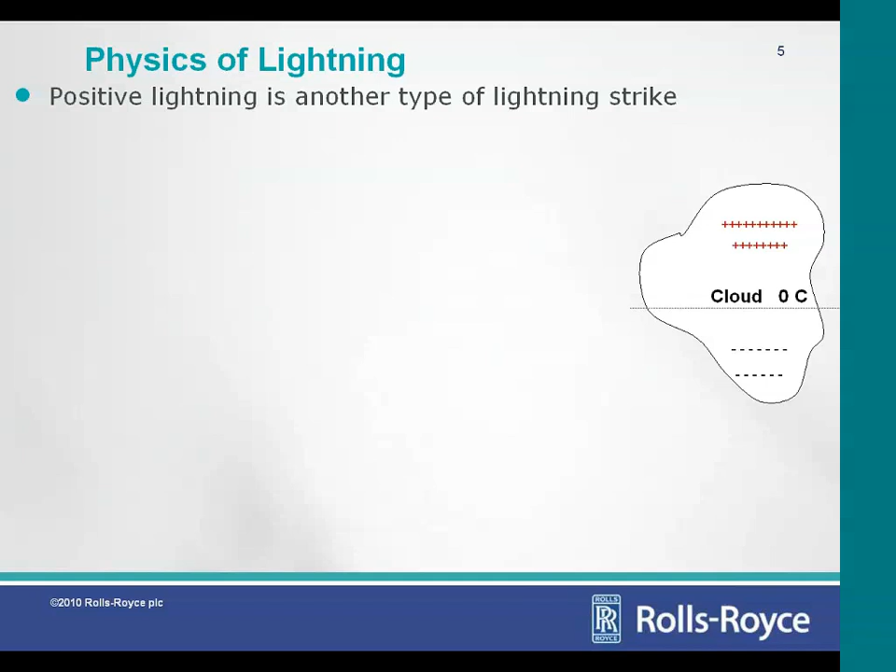Now, positive charges are accumulated on top of the cloud, and in this case, because of the height — the top of the cloud can be several kilometers higher than the bottom — the amount of charge that has to be reached on top of the cloud before you get enough energy to break the equilibrium and start the discharge is higher.

So normally, in terms of lightning populations, out of 100 lightning strikes, about 90 to 95% are negative lightning, as the previous speaker said, and about 5% or less are positive lightning. But it also needs to be said that positive lightning has much more energy and much more current.

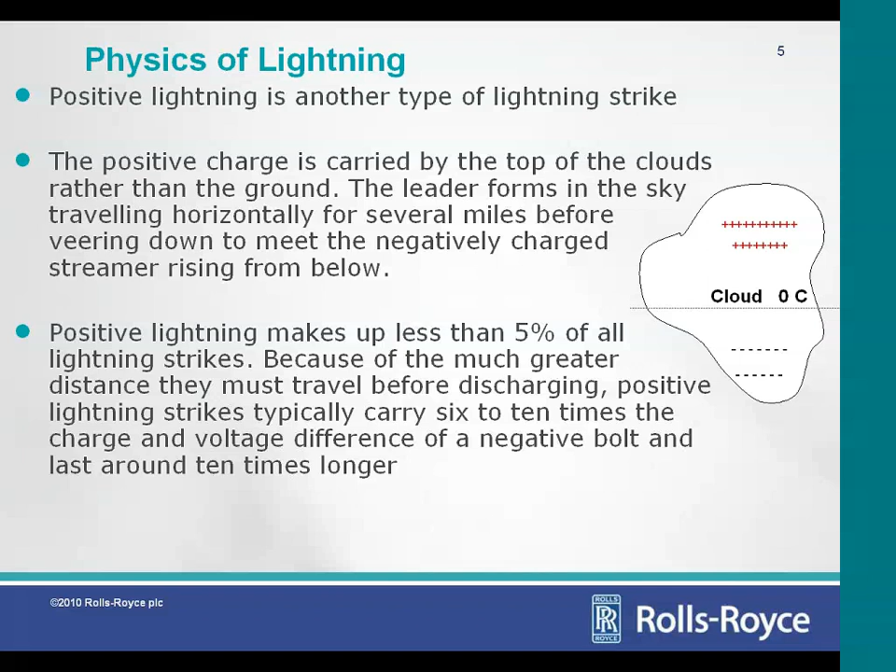So this is a picture which shows the lightning current as defined in the standards. It's a waveform which rises to the maximum value, defined in the standards to be 200 kiloamps within the first 6 microseconds, and then decays to half value at 70 microseconds, and then clearly tails off.

Now, if you do a spectrum analysis of that, so if you look at the energy density versus frequency of this pulse, you would see that the higher the energy is at the lower frequency. So as correctly mentioned, at higher frequency you inject less energy. This graph is quite important to remember when you do an analysis or some modeling. You have to bear in mind this relationship between the time aspect of the lightning and the frequency aspect and the energy density of the lightning.

As I said, the main lightning pulse in the standard is called component A, and it's a double exponential with 6.4 microseconds rise to the peak and then 70 microseconds tailing off, with a peak value of 200 kiloamps.

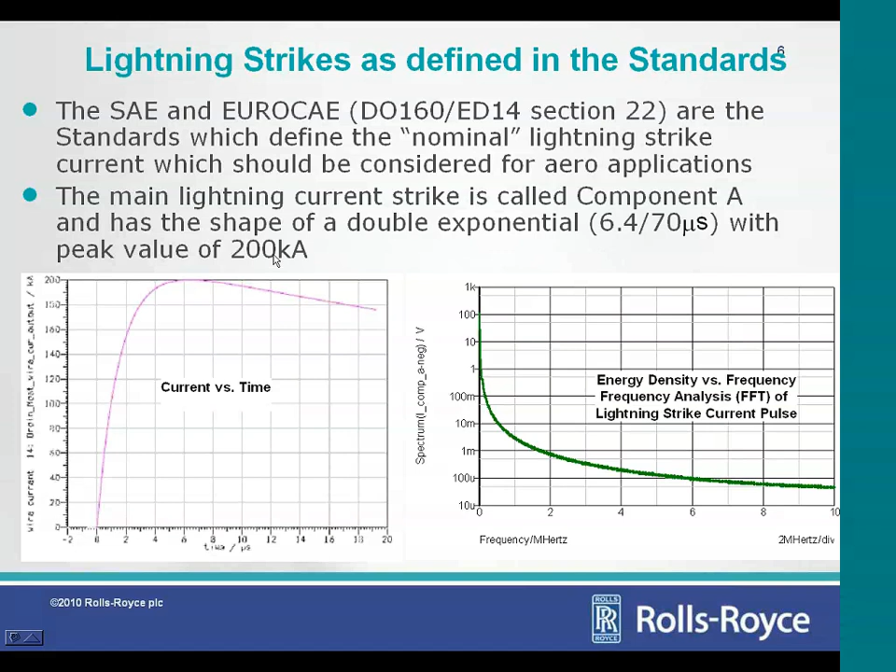Now, the limitation of the standard is that statistics indicate that you can get lightning which are much more energetic. In fact, you can get lightning with peak values of 250 kiloamps or higher. And also you can get lightning which lasts much longer than what the standards define—you can easily get lightning that lasts for 2 milliseconds. The first component, component A, can be about 20 times higher than what is defined in the standards.

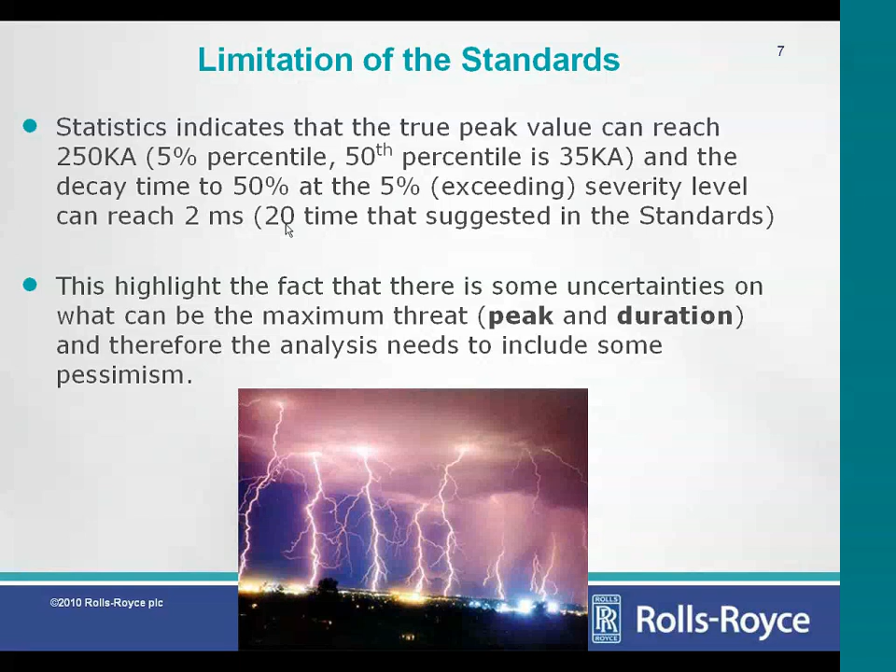So this highlights the fact that there are some uncertainties on what is the maximum threat in terms of peak and duration, because if you just use the standards, the DO160, you would see that the definition of peak and duration is not necessarily the worst case. Therefore, when you do an analysis and a design which needs to be robust to lightning, you need to include some pessimism in your analysis and have good margins on top of what you have to meet for passing the standards test.

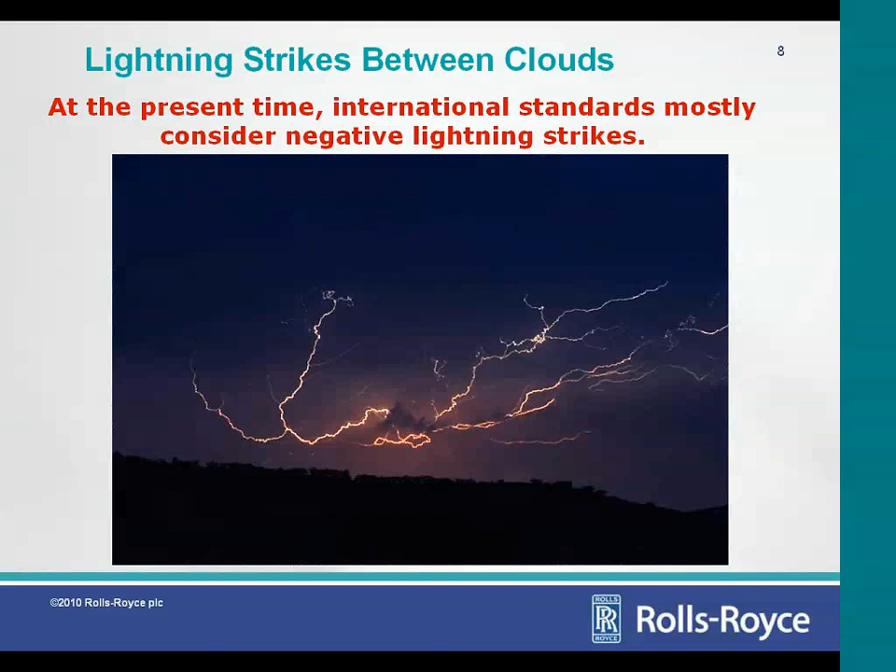So, just to recap, this is a nice picture because it shows intra-cloud lightning—lightning which doesn't close to ground, and it's quite energetic and covers a very big area in the sky. But as I said, international standards mostly cover negative strikes and not positive ones.

Now, what can this lightning current do to an aircraft? Well, clearly the simplest one to understand is actual physical damage. When you are hit by lightning, you basically have a sudden inrush of current that you need to quickly distribute away from the point of contact, because the temperature at the point of contact will start to rise quite quickly. And if the resistance of the point of contact is too high, so you're not able to take the current away quickly enough, then you will reach the melting point of the metal or composite structure which has been hit by the lightning. As soon as you get to the melting point, that's where you get significant damage to the structure.

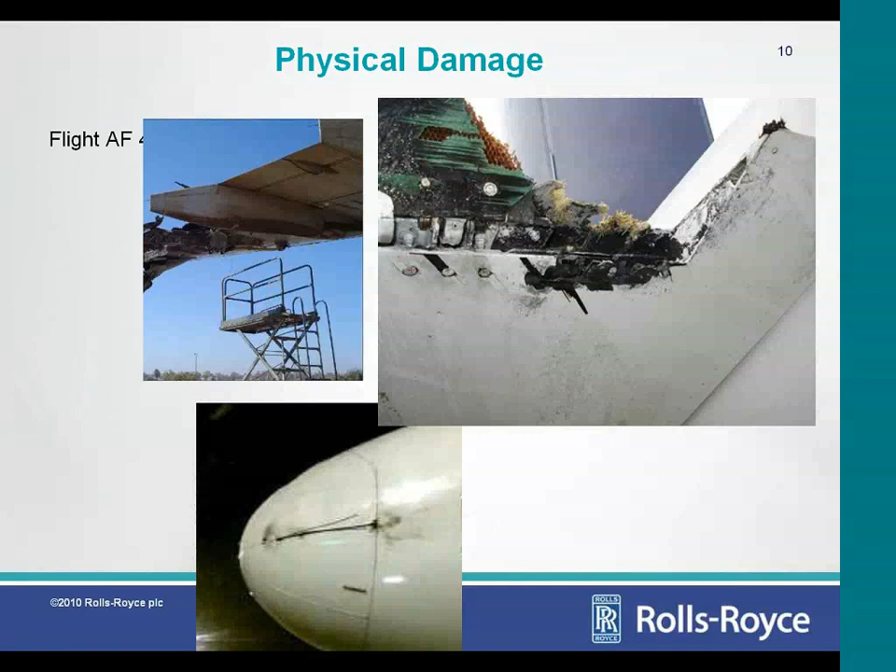Now, those are physical damages, but when aircraft fly in the sky, we also need to consider electrical equipment failure and electrical effects. Just to remind you this is not just theory—if we go back one year, about June 2009, there's the Air France 447 flight, a modern A330-200, which flew from Rio de Janeiro to Paris, leaving Rio about 10 o'clock midnight GMT. Around 4 hours into the flight, the aircraft flew straight into gigantic thunderstorms, major thunderstorms, which were reported in that area.

At 2:12 local time, so quite dark, the first major electrical fault was detected and sent through the automatic system on the aircraft. Basically, every modern aircraft has an automatic link to ground, and when there are major events, messages are automatically sent to the ground informing that there is major malfunctioning on the aircraft. This is without the pilot having to do any action. Modern electronics is such that if there is a major fault, this is immediately sent to base.

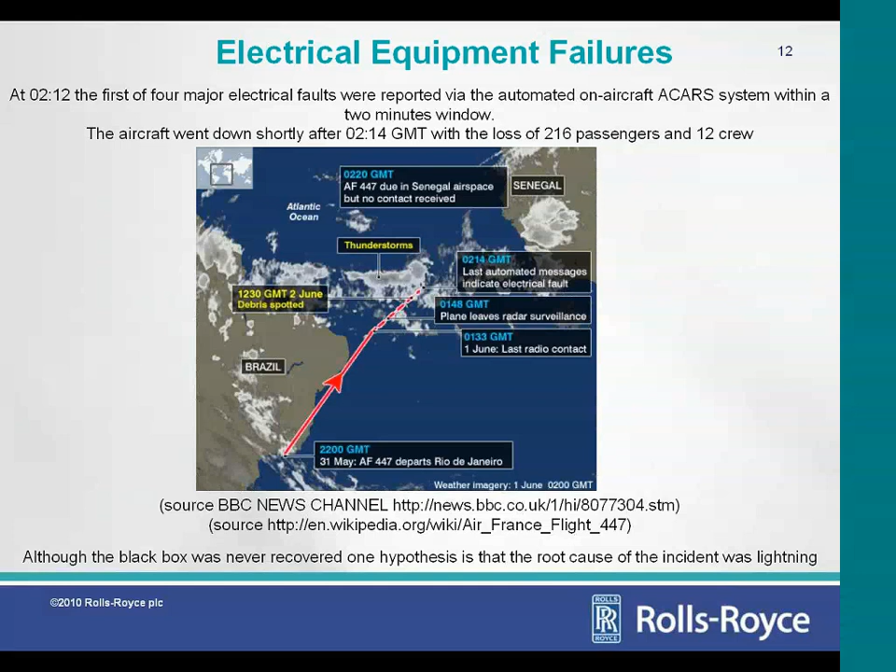So what are the challenges on modern aircraft? Electronic systems are more and more pervasive - they basically control everything on a modern aircraft. But in addition to that, modern aircraft use more and more composite materials. The Airbus A380 already has extensive use of composite materials, the Boeing 787 is composite all the way through, and the new Airbus wide-body aircraft, the A350, will be a fully composite aircraft.

Now, what does it mean for us? Composite aircraft means you have a much smaller ground return network. The electrical network inside the aircraft, which has the role of taking away the current from the structures, from the attachment point to the detachment point, is smaller compared to a metal skin aircraft. So an entire modern aircraft with extensive use of composite material will have a greater overall impedance, both in terms of resistive impedance and inductance. If you think about these two, it means you will have more energy dissipated onto the resistive structures.

So if you think about lightning attaching to an aircraft, which is the picture on your left, this current will induce onto the different structures, cables, and units a current which will have roughly the same shape - exactly what Paul showed you just a few minutes ago, where he was injecting this type of current into that simple structure, and then seeing a current of this sort distributing across the different parts of the box in that particular case. It also shows that if you use composite material, you see a stretching of the waveform due to the characteristics of the material itself.

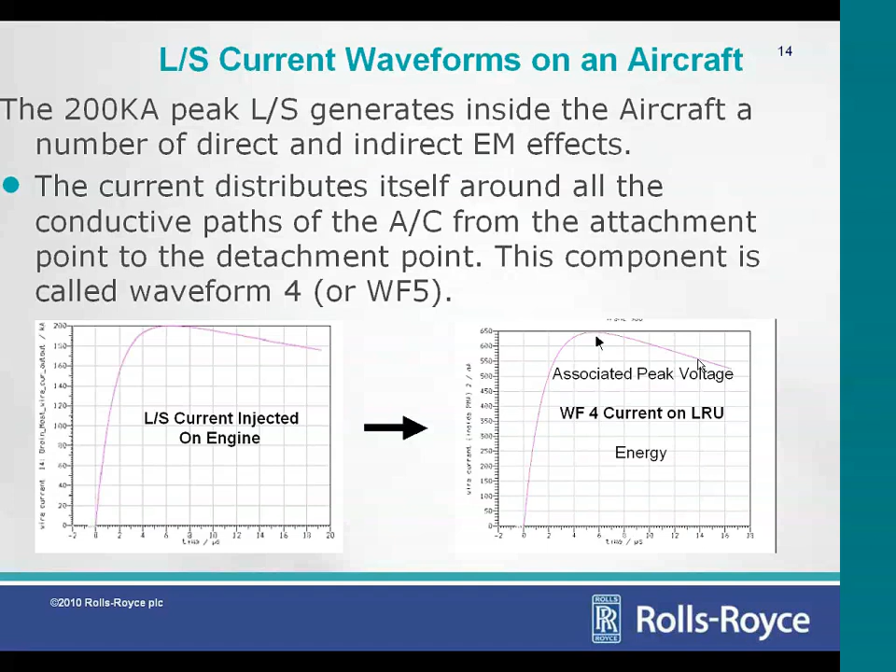But when you inject a current like this in a circuit, what you also tend to have is oscillatory effects. These oscillatory effects can generate quite high levels of peak voltages, which is a particular threat for electronic units, because with an electronic control system, every I/O will be protected for a particular value of peak voltage. If you exceed that value, you will probably damage the electronic units, and there will also be associated energy. So injecting this type of current, you will see oscillatory effects.

So when we address the question asked at the very end to Paul - why do you see a little bit of ripple there? Well, clearly, because of the dimensions of Paul's example, that ripple was almost invisible, and you wouldn't even think to do much analysis on it. But in the case of aircraft and engines, where aircraft have dimensions of 100 meters, and engines could be 4 or 5 meters long, 3 meters in diameter, and so forth, the oscillatory components could be quite significant.

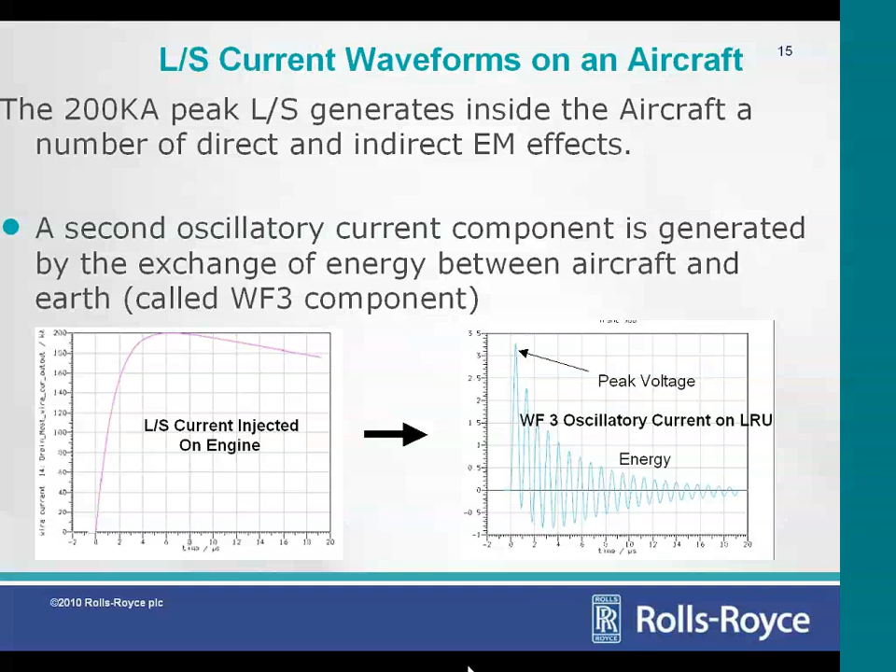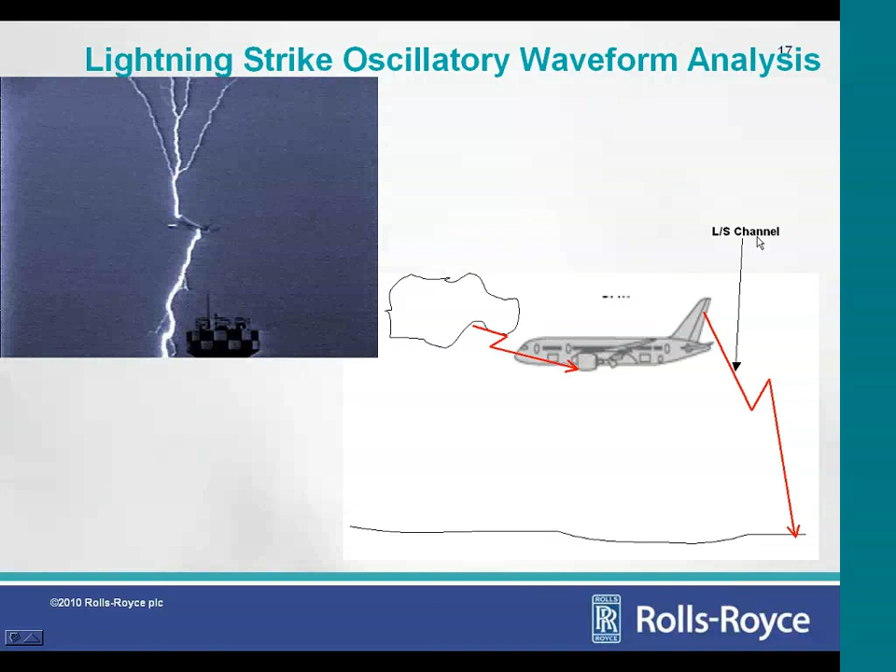So again, just to go a little bit more in detail, if you have an aircraft flying next to a cloud, you can have an attachment point, for example to an engine, and then the lightning strike will detach maybe at the tail of the aircraft. This path to ground is called the lightning strike channel, and its properties need to be considered.

In simple terms, you could see the aircraft as a capacitor, and the aircraft plus the lightning channel as an inductor. In a very simplified view, this is like an LC circuit, and anyone familiar with this kind of circuit would immediately think there could be oscillatory effects, which is exactly what waveform 3 is - oscillatory effects induced by the lightning strike.

So when you need to consider oscillatory effects, you need to model the entire aircraft, the entire engine, and where the aircraft is positioned with respect to ground. We're interested, or at least Rolls-Royce is interested, in understanding the effects of lightning on the electronics on our engine, so we model very accurately the electronics and the parts of the engine, and also how the aircraft is positioned compared to the ground.

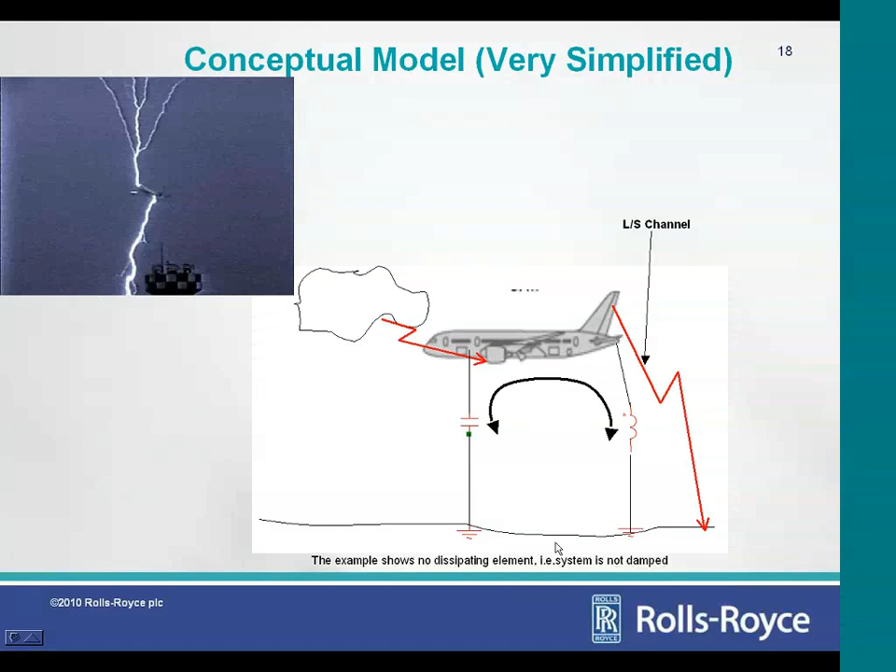So it's a quite complex model, and the dimensions could be quite daunting, because you can have models which may be 100 meters long or even more, and at the same time you need to model geometries at the engine's level, which could be a couple of centimeters or even less in resolution. So quite interesting meshing problems.

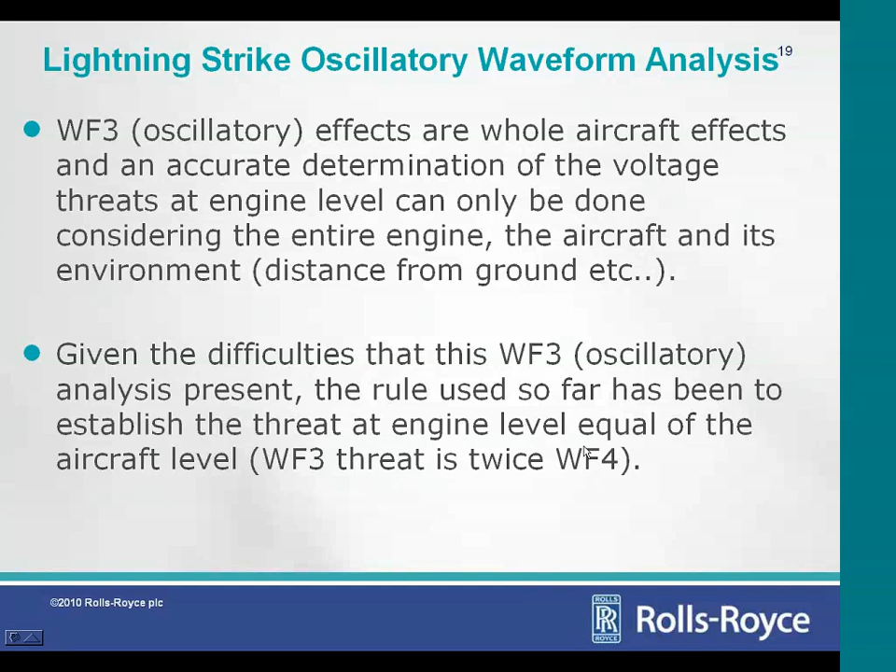So it's quite difficult to carry out a waveform 3 oscillatory analysis at present. In the past, something we tend to use is to assume that the waveform 3 threat, the oscillatory threat, was about twice as high as the waveform 4 threat, which is the nice double exponential current.

But this is not precise, so if you want to be much more precise, you need to conduct a study modeling the aircraft in different flight conditions - ground, takeoff and cruise - with different lightning strike attachment and detachment points. So immediately you can see that a lightning strike analysis is not going to be just one run, one simulation, because you probably need to consider several physical configurations.

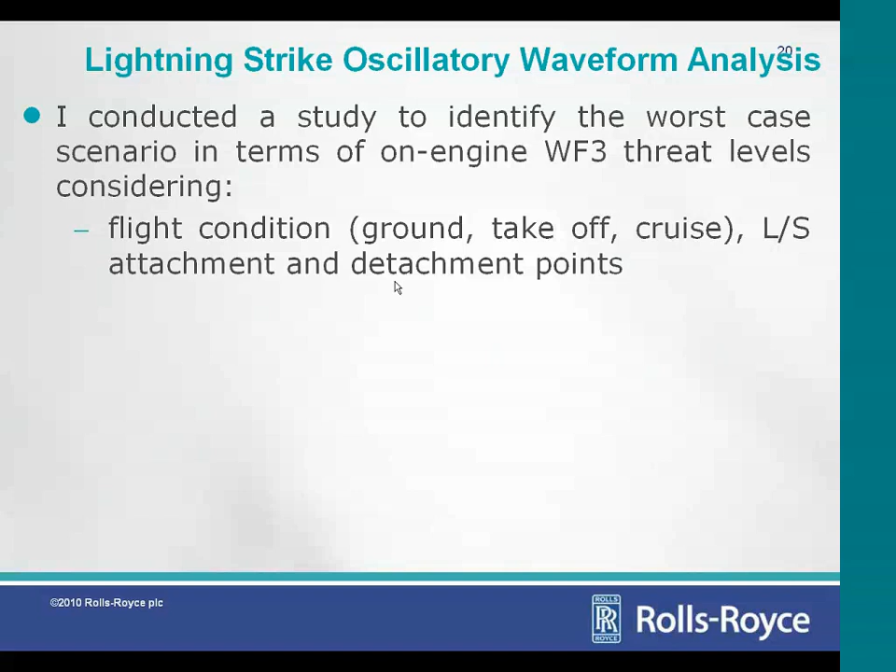So this is something you need to bear in mind, because clearly the time it takes to run a simulation - if you need to run several simulations, then you have to multiply the time for one simulation by the number of simulations you need to run.

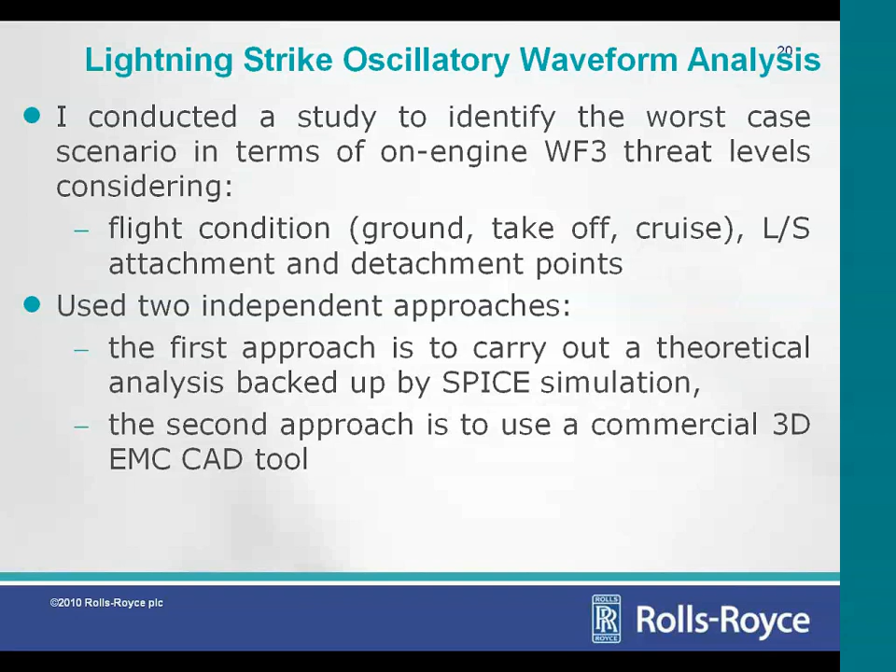So for this analysis, I used two approaches: one, basic theoretical analysis backed up by SPICE simulation, and another using the CST tools to do the analysis, and then I compared the two results.

The challenges in carrying out this analysis: first, you need to understand the physics of lightning, and review all the published data. A good overview was given in the first presentation. You also need to identify the critical parameters in the lightning channel properties, which are highly nonlinear and time varying, changing with height and with time.

The materials of the aircraft - in Paul's simple example, you immediately see the difference if you use a perfect conductor, aluminium, or if you use composite materials, and also physical dimensions. So in the case I've done, I created a theoretical analysis, then the SPICE analysis, and then the 3D analysis. For the theoretical analysis, I had to create electrical equivalent models.

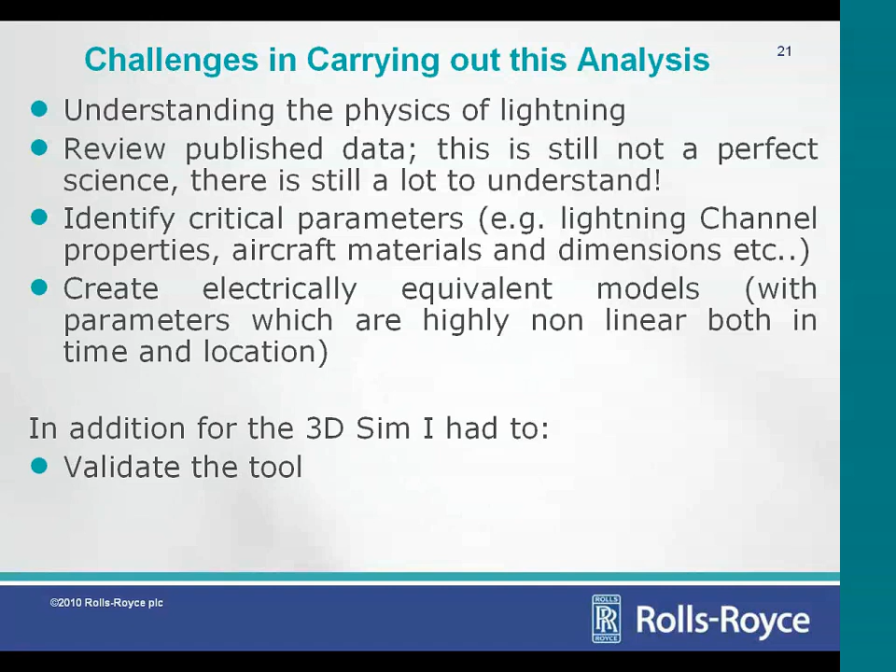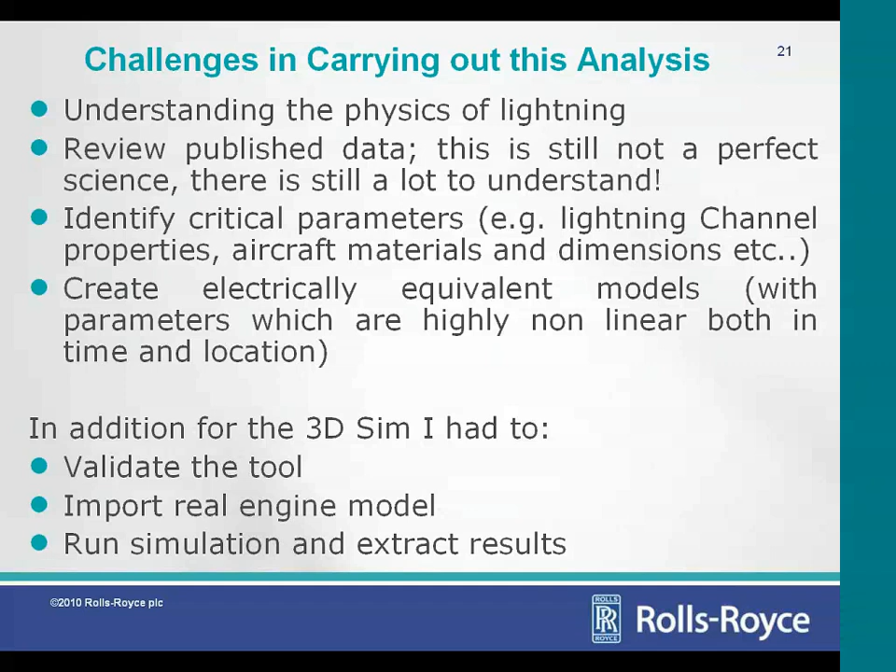For the 3D analysis, before using the tool, I had to validate it using existing engine data and existing results that we knew were accurate. Once we were happy about how to use the tool and what tips and tricks you need to adopt to get good correlation between the simulation results and real data, then you can run the models for the question you are asking yourself.

So in the case of the lightning strike with the oscillatory waveform, again, this is just a very simplified view of a lumped circuit of the system.

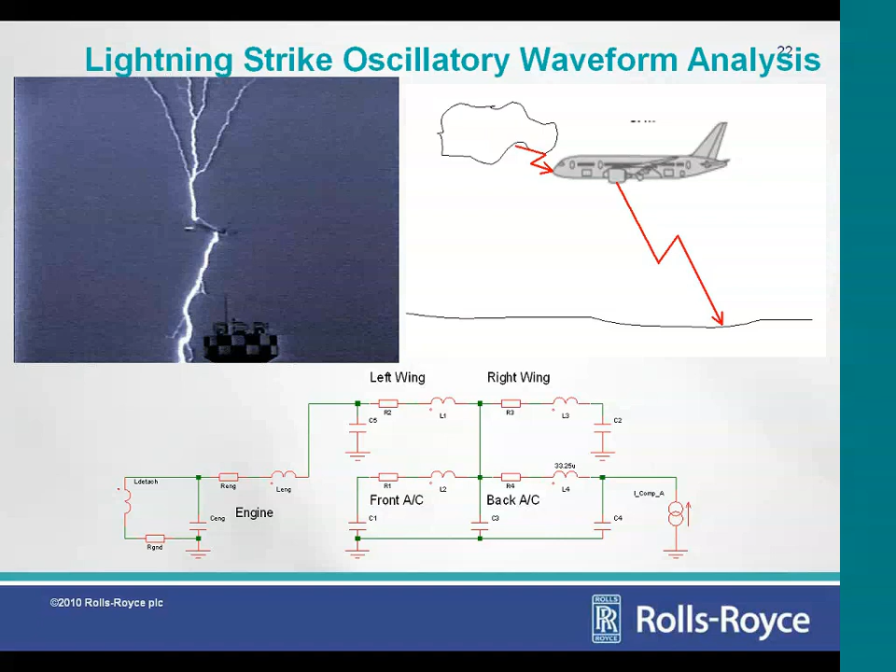Not going to spend much time trying to describe it, but it's a quite complicated model. This is just a simplified view of it. So the model becomes quite complicated.

What you tend to see is that once you inject this type of lightning, the worst condition for flight is when the aircraft is near the ground, which means you have the maximum coupling between the aircraft and ground. So the capacitance of this circuit is maximum when the aircraft is close to ground. If you have a big aircraft, because of the size, that capacitor value will be bigger, and also the position of the lightning strike connection is quite important.

In our case, where I was interested in looking at the effects onto the electronics of the engine, the worst case was when the lightning was attaching to the nose of the aircraft and detaching from the engine.

And here you can see one of the simulation outputs. What I found, with a particular engine and a particular aircraft, was that the relationship between the waveform 3 oscillatory components and the DC values of waveform 4 is about 1.35, as compared to the value of 2 which you would otherwise need to consider in the worst case. So clearly this analysis allows you to be much more accurate.

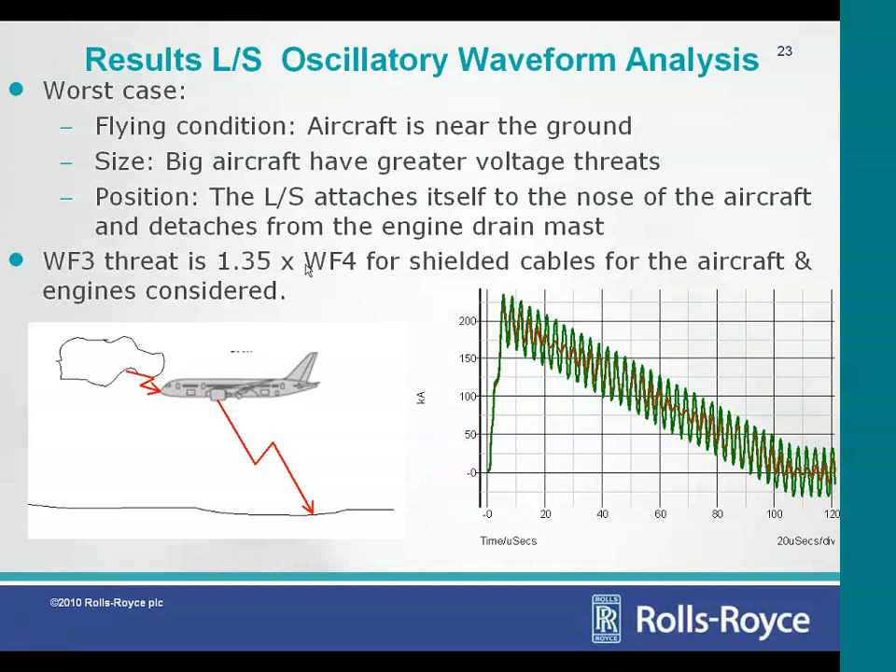As I said before, remember that because the energy density is higher at lower frequency, anything you do which makes the resonance of the circuit go lower in frequency means you're intercepting more energy, and therefore it is a worse condition.

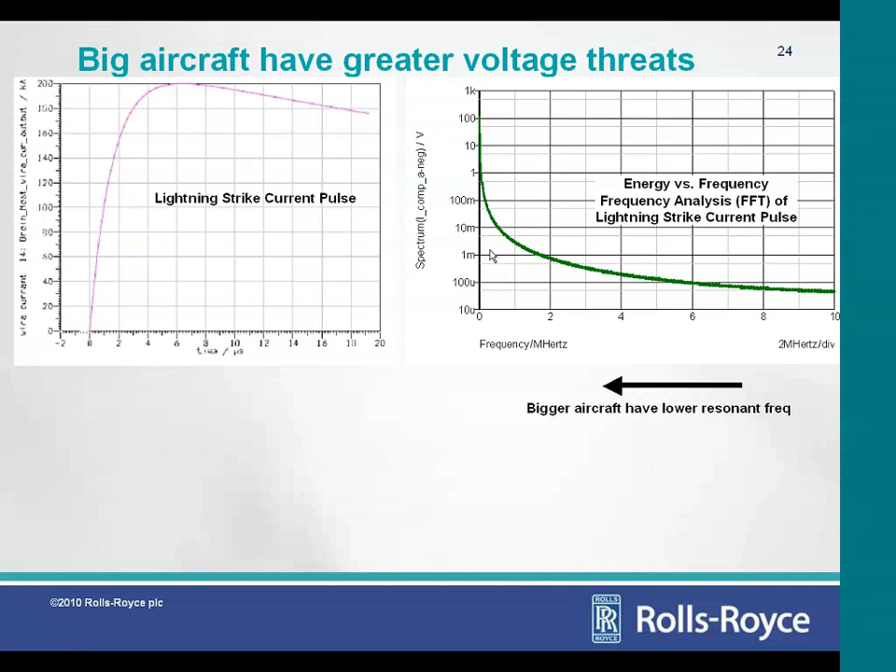So now you go into 3D modeling. We import a full engine model. This is just a simplified view. Again, for confidentiality we cannot show the full models, but this is a simplified view where you can see an aircraft jet engine. You can see a box up here, which is the electronic engine control unit, which basically controls the engine. You can see a number of wires. This is a very, very simplified view.

In yellow, you can see how the current would propagate when the lightning strike attaches to the drain mast, which is a metal pipe sticking out on the bottom of the engine, or if the lightning strike attaches to the plug. If you run the simulation, you can get very accurate definitions of the path of the current, and therefore how the current couples into the different cables, because what we are interested in, when we have electronic units, is the current which couples onto the different wires. So we need to understand how the current propagates into the metal structure of the aircraft and the engine, and how this current then couples onto the wires, in order to understand how this impacts the electronics inside our units.

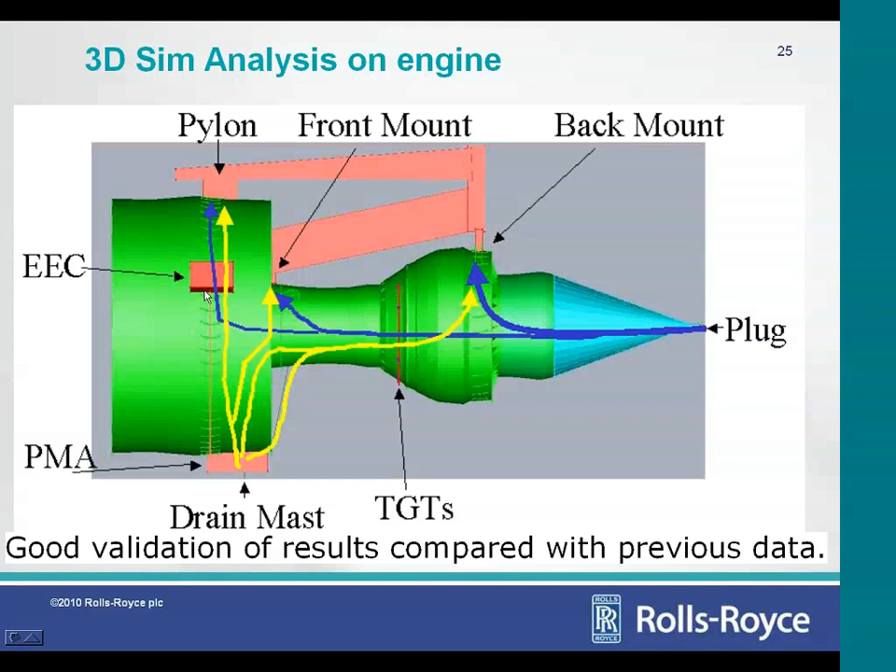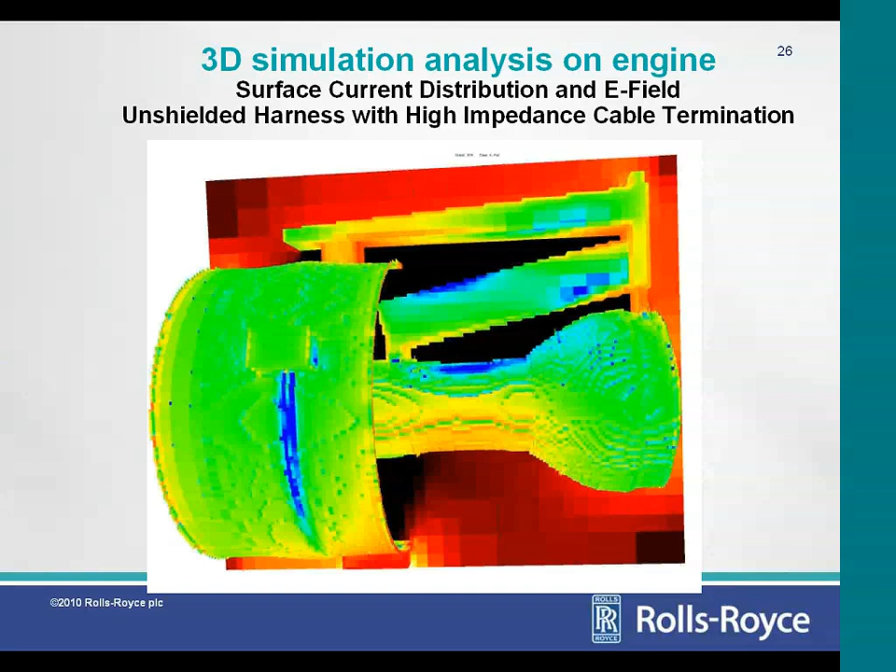Modeling tips. The first modeling tip I have is: try to understand what you are trying to model. What are the physical dimensions you need to model, and with what resolution you need that model to be.

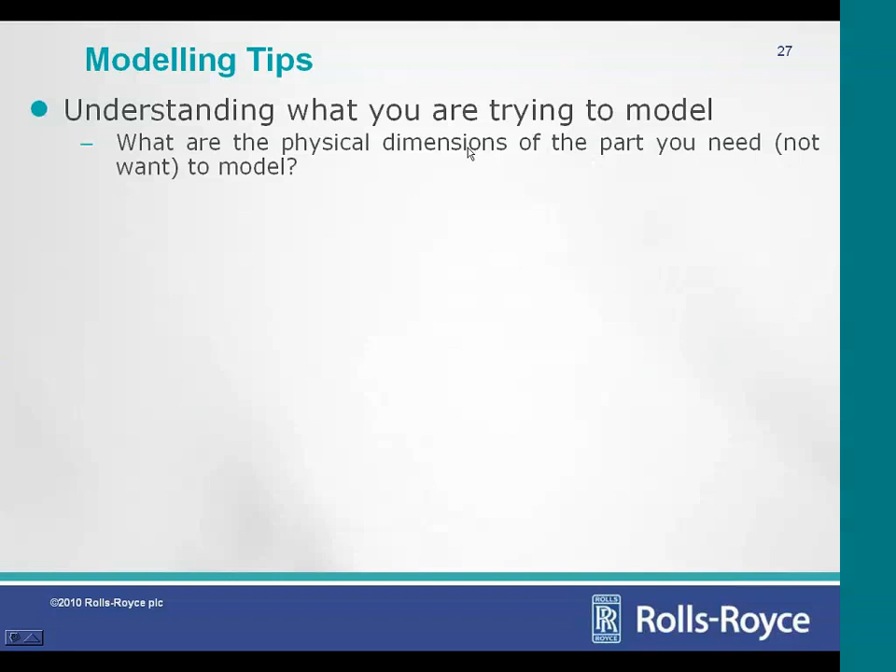If you have a very simple model in terms of dimensions, something like a meter or half a meter, that's fine, you can use quite a good mesh, and the time to run the simulation is not a concern. But when you start modeling, for example, a car with dimensions of 5 meters by 3 by 2, or if you're trying to model an entire aircraft or an engine of an aircraft, dimensions could be 4 meters by 3 by 3 in diameter. So you're talking about big dimensions. And if you want to model the environment, you may model something which is 100 meters. So you really need to understand the dimensions of your problem and how these affect the meshing, because the first thing you need to do is try to simplify your model as much as possible.

In our case, when we were trying to model the effect of lightning on the aircraft engines, Rolls-Royce was interested in what happened in the engine electronics, so we didn't need to model the aircraft in a lot of detail—you can use a very simplified aircraft model. We weren't interested in the aircraft electronics; we were interested in the engine electronics, so we used very accurate models of the engines. The further away you go from your area of interest, the more simplified the models can be.

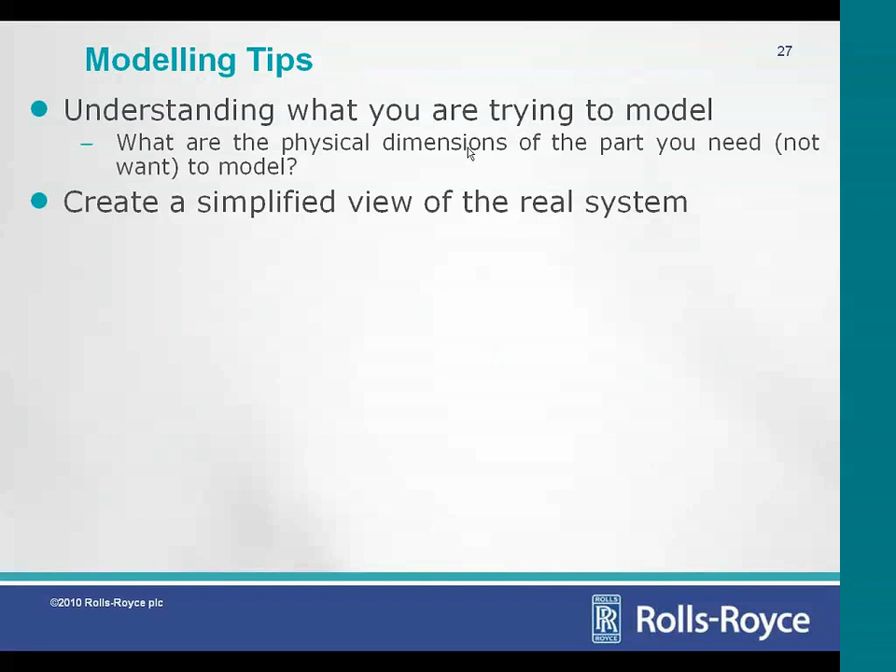It's key that you optimize the mesh. Paul mentioned frequency: a lightning strike has relatively low frequency content, but depending on the dimensions you have, you may need to consider frequencies of 10, 20, or 30 megahertz.

But you need to be careful, because if you set a higher frequency boundary for the simulation, the time it takes to run will be longer, and the mesh elements will need to use a smaller mesh size.

You need to understand the frequencies that will play into your model, and use a bandwidth that's correct for the problem, but don't overshoot. It's easy to say 'I want to capture everything, so I'll set the top frequency to 100 megahertz'—that's fine if the model is small, but if it's moderately big, that will kill you. The mesh size will become too small.

You really need to understand and optimize the mesh, because mesh size dictates how long a simulation will run—it's one of the key elements controlling simulation time.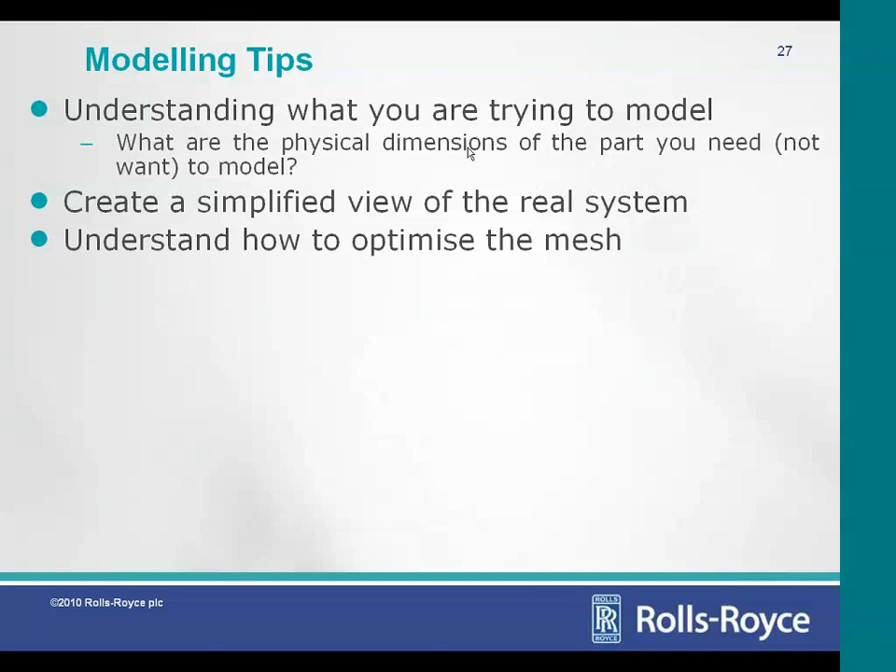You don't want to run a simulation that takes more than 48 to 50 hours. At Rolls-Royce, our target is that the longest simulation we want to run is one we set up on Friday and get results from on Monday. If it takes two weeks to run a simulation, that becomes unacceptable, because you want to run several of those simulations. So you need simulations that run over the weekend at worst, but ideally ones that can run in a couple of hours.

Use cable models when you have small cable bundles. The CST tool has a very powerful capability for modeling cables in a simplified way, and if you can use that, use it, because it simplifies your model and accelerates the simulation speed. If you have small cross-section cable bundles, I'd encourage you to use cable models, as that will speed up your simulations.

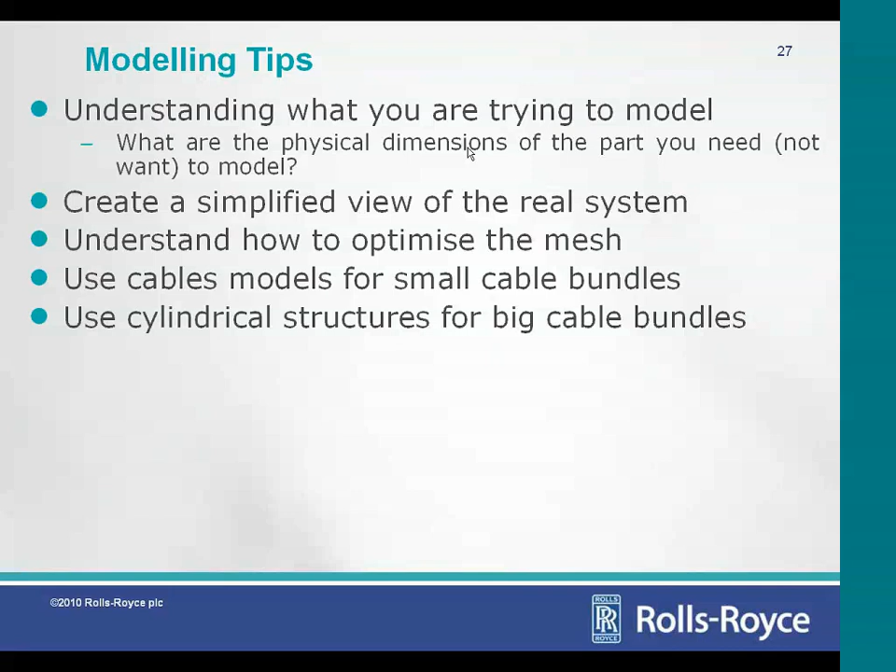Of course, if you have big cable bundles—say a cable bundle with a 2-inch, 5-centimeter cross section—it's hard to use a cable model for that, because the mesh size would need to be quite big, and with a very big mesh size you wouldn't be able to resolve the structure of your engine. If your engine's minimum dimension you want to resolve is a couple of centimeters, you can't have a 10-centimeter mesh size, because you can't resolve a 1-centimeter physical dimension with a 10-centimeter mesh.

Then you have to run the simulations, but run them just for the time you need. The example Paul showed before had the simulation running for 100 microseconds. At Rolls-Royce, we'd tend not to do that—instead you try to identify the part of the simulation where you get the maximum data out. Normally, for a lightning strike with a peak at about 6 microseconds, if you run for 8 to 10 microseconds, you can usually capture most of the effects.

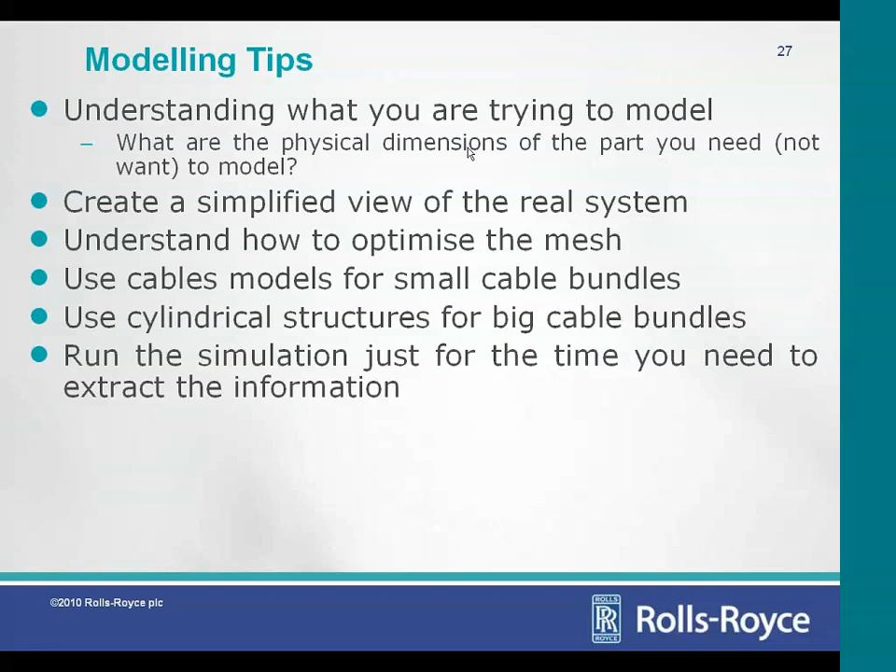I accept that sometimes the current hasn't yet reached its maximum. If that happens, you need to stretch the time window, but try not to run for the full duration unnecessarily. If the peak current is at 6 microseconds, it's good advice, at least at the beginning, to just run for 8 to 10 microseconds—don't run longer than that. It's just to keep your simulation manageable.

Try to do a lot of quick trials. The last thing you want is to create a gigantic model, mesh it, and then find that the mesh won't resolve properly—creating a monster you simply can't simulate.

Try to create the model and try to create quick trials. Mesh it, if it doesn't work, remesh it and refine it. Try to use the cable models, see how much you can stretch them, and know when you need to stop and start using pipes instead.

Try to do lots of quick trials before you run the full simulations, and refine your model. I find it quite useful to use variables in the CST tools. For those who don't know what I'm talking about, you can basically parameterize some of the dimensions so that whenever you need to make changes, rather than going and changing the physical dimensions, you can just change variables at the top menu and the model automatically adapts. I found that quite powerful.

Although unfortunately you cannot use variables for circuit components. One of the features you can do in CST is to define small circuits, but unfortunately, on version 10, the version which we have, you cannot put variables on those electrical components.

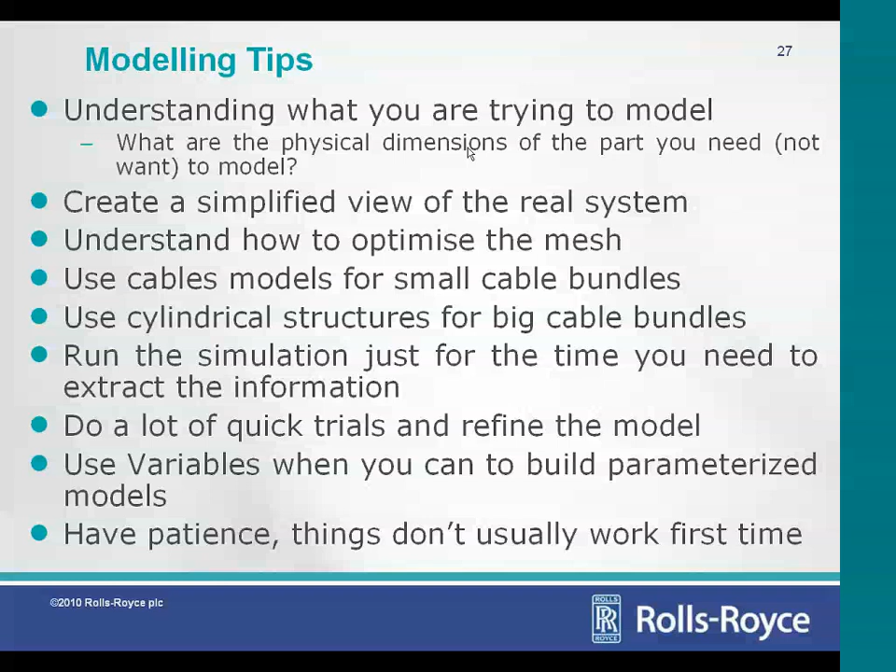And with that, I finished.

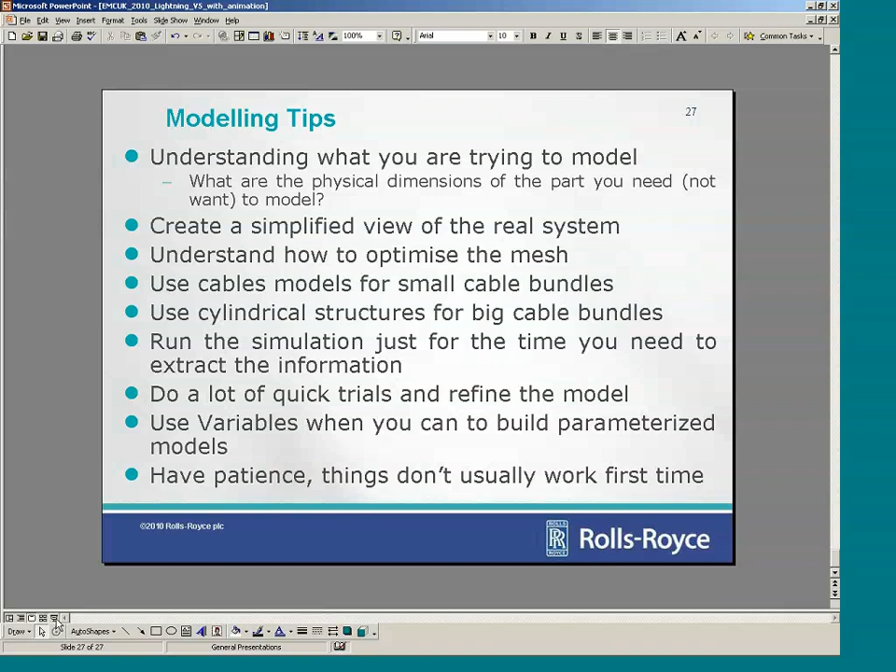The model we have done, when we did the model, we made a complete and exact model of the engine and a very simplified model of the aircraft. But the dimensions have to be correct, the materials need to be correct. The fact that we haven't modeled the aircraft in a lot of detail is simply because, as Rolls-Royce, we are not interested in knowing what happens to the electronics inside the aircraft. We're interested in knowing what happens with the lightning strike effect on the engine. So we have modeled the engine, all the electronics on the engine, all the cables on the engine, everything.